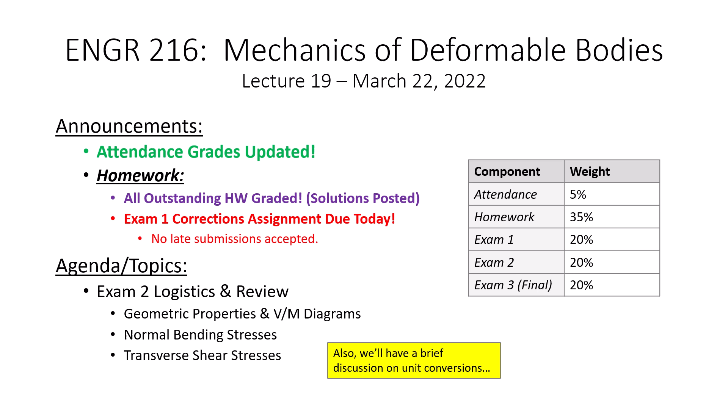Yes? We'll get the exam on Thursday. Are we all going to spread out like we did last time? I'm going to talk about that. The short answer is I'm not sure that it's really needed since it's going to be closed book. But I'm going to talk about that. So let's get into the logistics for the exam.

So again, we're going to do things a little different with this exam and the final. It's going to be closed book and closed notes because I want you to go through the process of preparing a formula sheet. I'm going to talk about the formula sheet in a second. I design my exams the way I've always designed them. I don't design them to be time critical. And the format's going to be largely the same.

There's going to be a series of short answer questions on the front, and then there's 3 computational problems for the exam. You are allowed a calculator, and I don't really care what calculator you bring as long as it doesn't have a Wi-Fi connection. I do highly suggest that you bring a straight edge. I think a straight edge will help you in the construction of shear and moment diagrams, and that'll save you some time, okay?

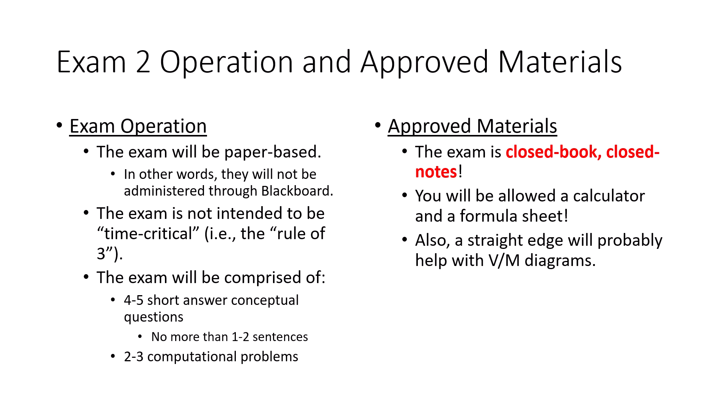Let's talk about this formula sheet. You can bring a formula sheet, it's an 8.5 by 11, both sides. You can put whatever you want on it, but there are the following stipulations. Number 1, make sure you have your name on it, because I am going to collect them afterwards.

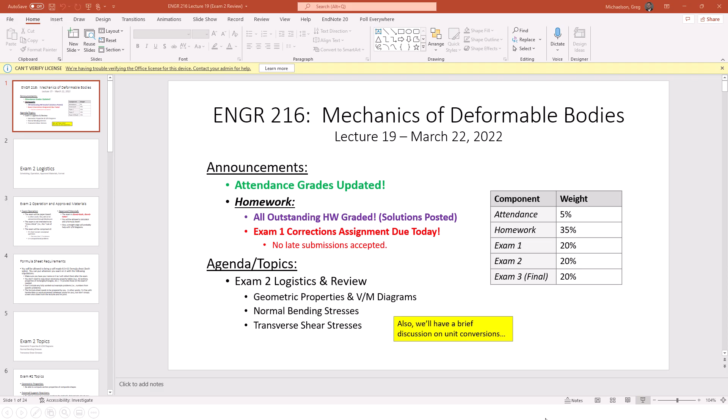You can put it small and maybe in the top right corner. Just make sure that I can find whose is whose, because I'll give them back to you after the exam's graded. You do not need to copy down necessary property tables. Not only is it in here, but it's on Blackboard. I want to show you, I'm actually giving you this on the exam.

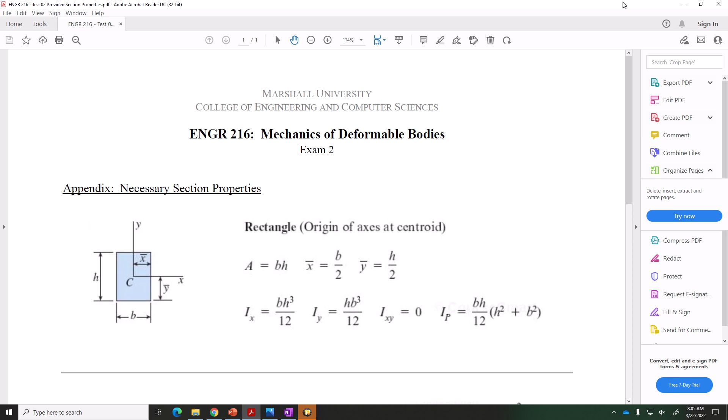So not only am I going to give you, here, let me move that mouse cursor out of the way. So not only am I giving you this, all of the necessary section properties for a rectangle, but I am also going to give you this, okay? You're going to get this snippet of the table from the back that has all of the properties of wide flanges. So you're not going to need to copy that down onto your formula sheet. I'm telling you right off the bat, this is what I'm giving you. And I'll go ahead and give you another one.

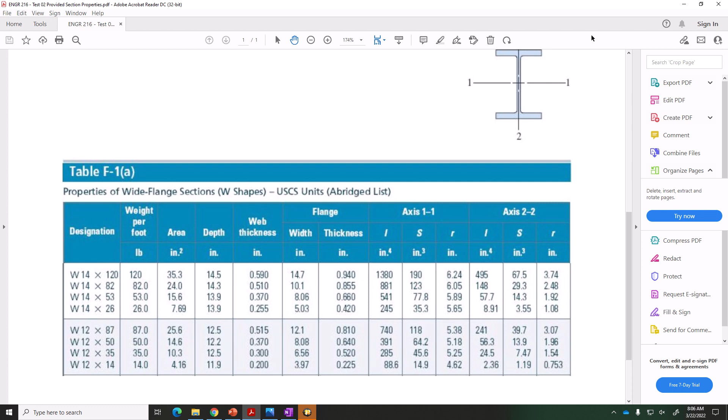Notice how the only shape that I'm giving you is the moment of inertia of a rectangle. In other words, any moment of inertia calculations that you need to perform on the exam, you will only need this, okay? No triangles or circles or anything like that. So I'm trying to make that part as easy on you as possible.

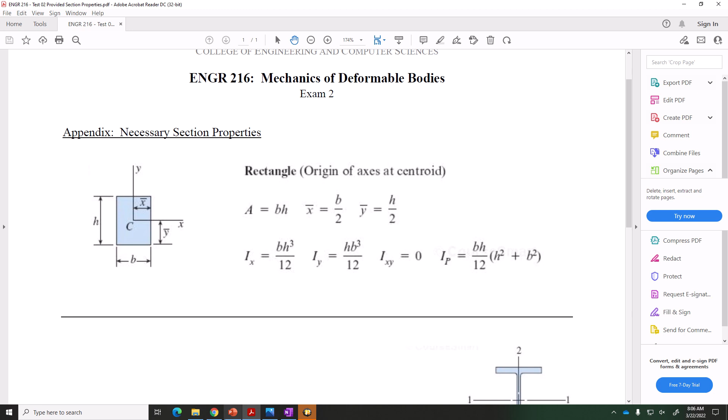In terms of remaining stuff on the formula sheets, one big thing is I don't want you to include any fully worked out problems. And what I mean by that is no numbers from specific problems on homeworks or the lectures. And I promise that's for you, not for me or trying to be stringent. There were a lot of instances on the first exam, where the exam was open book and open notes, where there were values on the exam that were sort of showing up out of nowhere. For example, there was a problem on the exam that had a 2x2 square bar, and a lot of people were saying that the area was 0.196 square inches. I'm like, where is that coming from?

And the reason is that we did a lecture problem that was kind of close to that, and that was the area in the lecture problem. So a lot of people were just using that value, and I actually think it added more mistakes. So that's the reason why I say don't include any fully worked out numerical problems with examples, because I actually think that'll hurt you on the exam.

But the last thing is I do think the formula sheet needs to be prepared by you. Okay, what I mean by that is I don't care if you handwrite it. I don't care if you use a word processor. I don't care about that. What I think would not be in your benefit is if you just took the screenshots from Blackboard, did a screenshot, put them on an 8.5 by 11 and hit print. I don't think that would be a valuable exercise.

I know you would probably have an adequate formula sheet in the space of about 5 minutes, but I think you would not engage in the process of actually making the formula sheet. And I think that process is important because by doing that, you're actually studying. Okay, and that's what I'm really interested in.

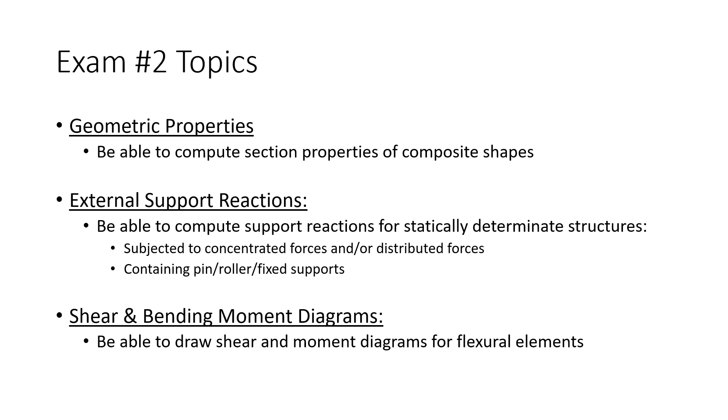Did I lose my clicker there?

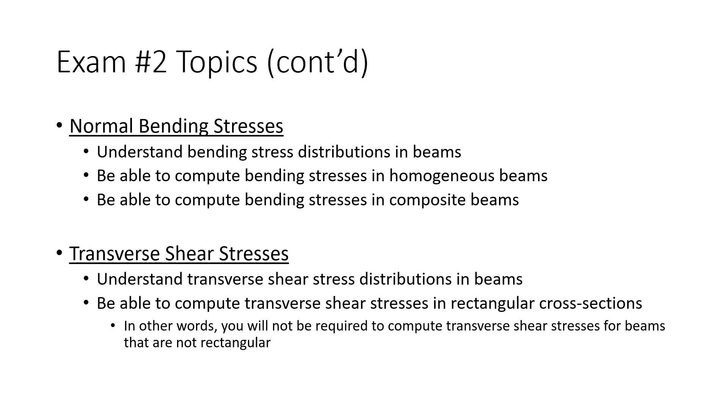For transverse shear stresses, make sure that you can understand what the stress distribution looks like, and the big deal is be able to compute transverse shear stresses in rectangular cross sections. In other words, you're not going to be required to compute transverse shear stresses for triangular beams or I-beams or circular beams or anything like that. Only rectangular beams. So I'm restricting that again to try and make that a little easier for you.

You all know that on the exam review slides, I tend to include a greatest hits of all the necessary formulas and equations to try and make studying a little easier for you. So here are, I would think, the relevant formulas and expressions for exam 2. First off, I'd say the parallel axis theorem is a big one. So the parallel axis theorem is what we use to compute the moment of inertia of any shape that is comprised of a series of simple shapes.

So if I have a cross-section that is composed of rectangles and triangles and circles, oh my, I can compute the moment of inertia of that collected shape using this expression, the sum of I naught plus AD squared. I naught is the centroidal moment of inertia of each individual shape. A is the area of each simple shape. And then D is the distance from the centroid of the simple shape to the centroid of the entire region.

And we determine the y bar, the centroid of the entire region, by just using sum of AY over sum of A. We have a tabular format that we've used in multiple examples in order to determine the moment of inertia of a composite shape. And when I say composite shape in this regard, I mean something that's not just a simple rectangle, like channels or angles or I-beams or beams with holes in it, etc. I'm not talking about beams of two materials when I use the word composite here.

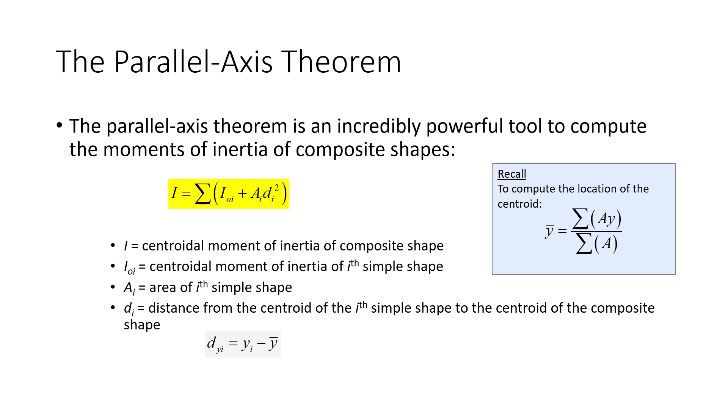Next, shear and moment diagrams. So all I include here on this is sort of the logic and the rules that we use. So for example, we understand the relationship between load and shear. So at a given point, the slope of the shear diagram is equal to the load on the beam at that point. And then between any 2 points, the change in shear is equal to the magnitude of load. Then we can draw a similar analogy between shear and moment. That at a given point, the slope of the moment diagram is equal to the shear, and between any 2 points, the change in moment is equal to the area of the shear diagram between those 2 points.

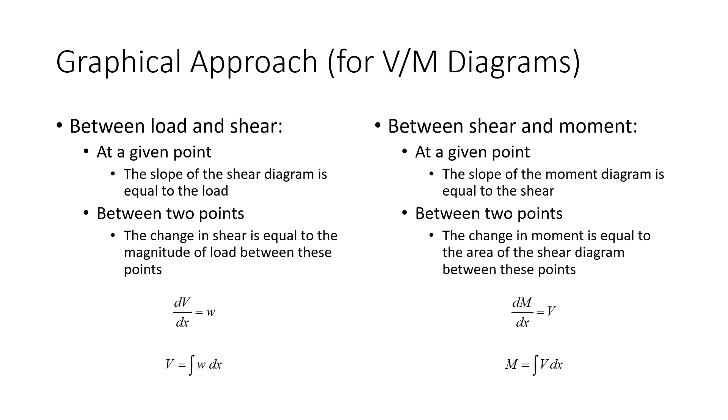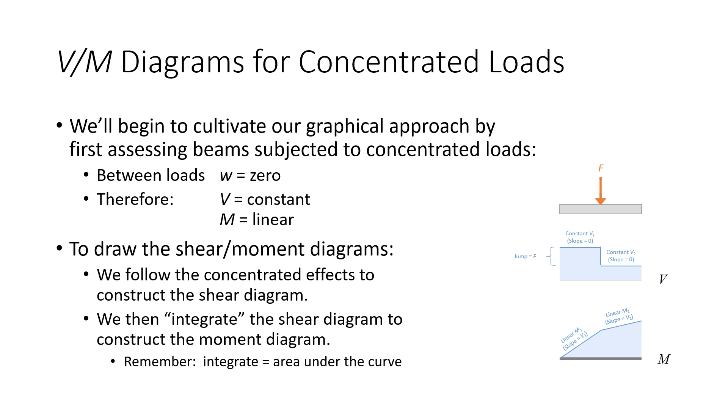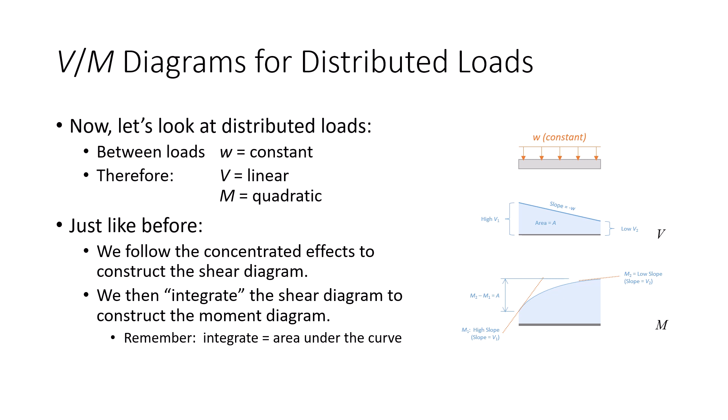What we had developed were rules for constructing shear and moment diagrams for concentrated loads, and then shear and moment diagrams for distributed loads. And for concentrated loads, we had sort of that stair-step pattern for the shear diagram, and then for the moment diagram, it was sort of that piecewise linear function where the slopes of the moment diagram were equal to the values on the shear diagram. For distributed loads, we have a linear shear diagram and then a quadratic moment diagram. And we use our sort of lot to a little or little to a lot analogy in regards to the slope because again, the slope of the moment diagram is equal to the shear.

Our bending stress formula is probably the real new stuff on this exam. The other stuff, in some degree or another, we've seen. I mean, we've seen centroids in statics, we've seen shear and moment diagrams in statics, so what we did in here was sort of a crash course refresher, but this is the new stuff. So to compute normal bending stress, we use the expression sigma equals My over I, so M is the applied bending moment, I is the moment of inertia, and y is the distance from the centroid to the point in question.

So I remember I did have somebody ask, well, how do you actually construct this? Well, it's just a line. That's the centroid, My over I. This is the y for this point. This is the y for this point. Just compute a stress.

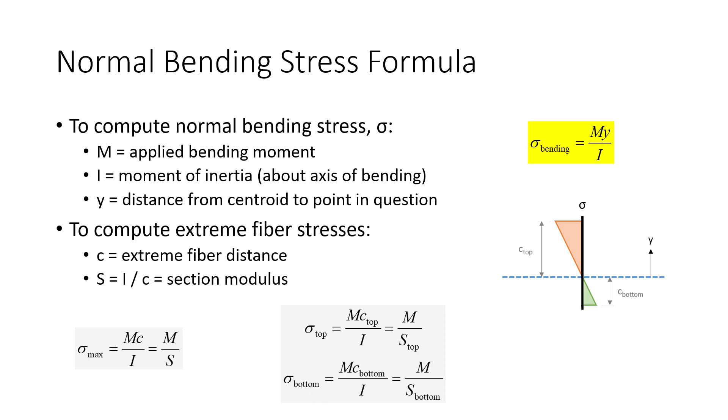Distribution, we know that the maximum bending stress occurs at the top and the bottom, and so we tend to use this term C, which represents an extreme fiber distance, to relate the maximum bending stresses. So sigma max, we tend to say is Mc over I. And if the section is symmetric, we can say that the stress on the top and bottom will be identical, and we can use this section modulus, M divided by S, to compute the maximum bending stresses.

Now for transformed sections, this is a little bit of a new slide, but I thought it kind of captured everything that's important for transformed sections all in one slide. So first off, note the use of a modular ratio. We tend to compute modular ratios as being bigger than 1. E divided by the smaller E, so the E for the stronger material, and E for the weaker material on the bottom. Now, in terms of transforming, we sort of have two options, okay?

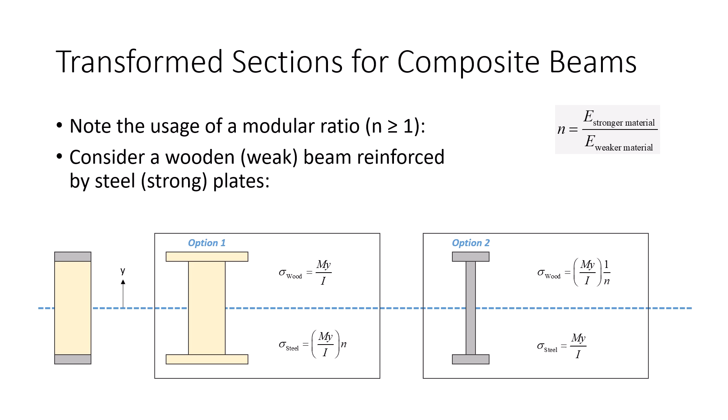So if we transform everything to a weak material, the stress in the weak material is computed. The stress in the strong material we have to adjust by n. Similarly, for this option, the stress in the strong material is just My over I, but for the weak material, where here we multiply by n, here we're dividing by n. Okay? And so I thought that was hopefully a simple but neat way of collecting this idea all into one slide.

For shear stresses, VQ over Ib, V and I are constants. b conceptually can be a variable, but for a rectangular beam, what really changes for a rectangle is Q, and Q is, if we're talking about a rectangle, the area of the section times the moment arm, the distance from the centroid of the beam to the centroid of the block that we're considering.

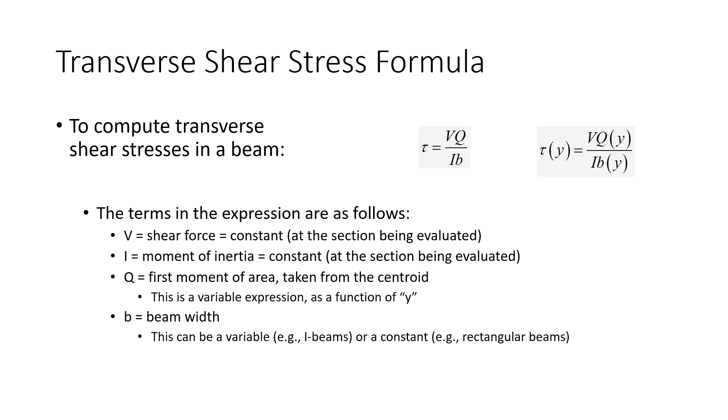Okay, now, I am going to open up the questions here in a little bit. I want you to sort of let this stew and marinate in your brains as you collect all this. But I got something I want to do on the side. I want to talk about unit conversions and dimensions. I think that during this course, and honestly, maybe this should have been something I did on day one, but I guess I had an assumption that this was stuff that you had seen in other classes, but I'll tell you, there were a lot of trip-ups on the exam regarding this stuff, and this is usually pretty easy.

I cover this not because I don't think you can do it, I know you can do it. I want to try and prevent simple mistakes and simple things that you need to do on the exam. What I don't want to have happen is I don't want you to have a problem with the unit conversions and it causes a greater confusion with the exam in general. I want this to be the easy part, and so I want to cover this in a somewhat formal fashion. Now, if you're good with unit conversions and you're comfortable with this, I apologize that the next 10 minutes are maybe a little boring, but I want to make sure everybody's familiar with this, okay?

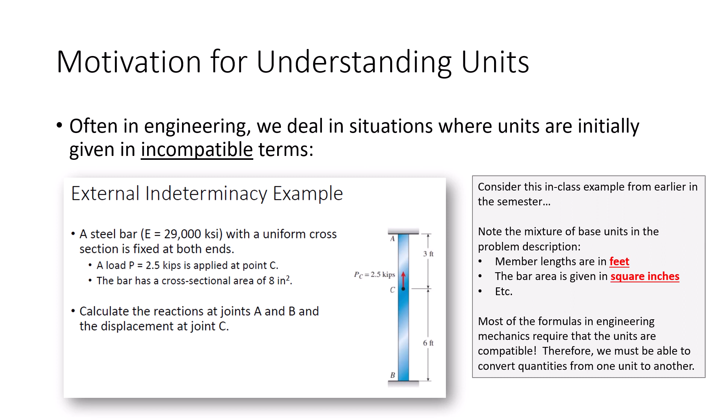These are common things that engineers have to deal with all the time. Just about every equation that we use in this class assumes that the units are compatible, that they are dimensionally non-specific. And so it's the responsibility of you as the engineer or you as the analyst to convert the quantities into a usable unit system. And this was an area that really tripped a lot of people up on the first exam. Now, how we deal with this is to use unit conversions, okay?

In other words, what we do is we use known unit equivalencies to express a quantity in desired terms. So a known equivalency would be something like 1 foot equals 12 inches, right? That's a true statement. So 1 foot divided by 12 inches is 1. I'm not saying 1 divided by 12 equals 1. That's not the case. I'm saying 1 foot divided by 12 inches equals 1, okay?

And so by multiplying a given term by these conversion factors, we're eliminating the undesired units and expressing a quantity in terms that we want to use. Let's consider this. We had a problem very similar to this on the exam where you had to take a quantity that was in pounds per foot and convert it to kips per inch. A lot of people had issues with this, and so I want to make sure that we're comfortable with this. How do we convert 3,200 pounds per foot to so many kips per inch?

Well, we know the following. These are my unit equivalencies. I know that 1 foot equals 12 inches. I know that 1 kip equals 1,000 pounds. So the way that we do this is we usually set up the following table. I have this horizontal line, and I can draw it as long as it needs to go, and I start out with my given quantity, 3,200 pounds on top and the foot on the bottom. This pounds per foot, that's a fraction, right? So pounds goes on the top, feet go on the bottom. And what I want is kips per inch, okay?

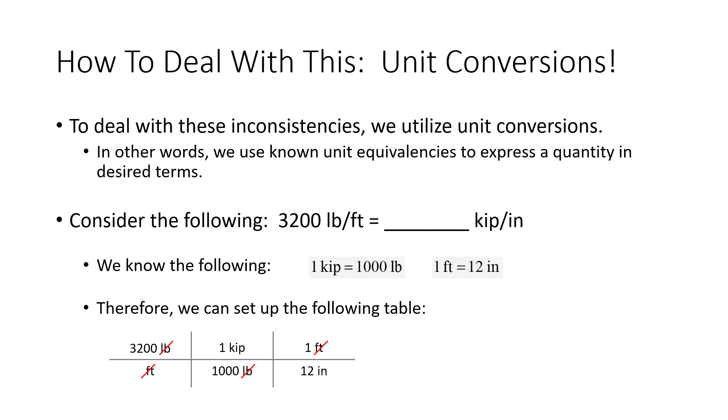I need to use another unit conversion. In this case, I'm placing the foot on the top and the inches on the bottom, because I've got foot on the bottom, foot on the top. And there you go. What am I left with? Kips and inches. So this is what I plug in my calculator: 3,200 times 1 times 1. Typically with unit conversions, you can ignore the ones. So 3,200 divided by 1,000 times 12, I get 0.2667 kips per inch. That's how you do that, okay?

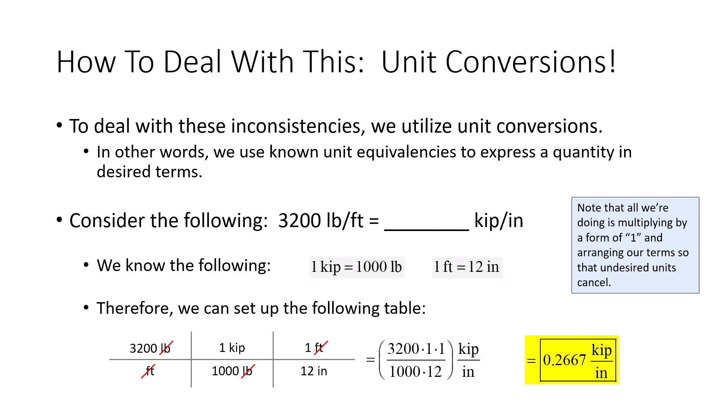Is everybody comfortable with that? Because we're going to do some problems to make sure that everybody is comfortable with it. I know if this seems too simplistic for some of you, my apologies, but I don't want this to be a sticking point on the exam. Again, note that all we're doing is multiplying this by a form of 1. 1 kip over 1,000 pounds, that's 1. 1 foot over 12 inches, that's 1. But we're arranging it so that our undesired units cancel. That's all you're doing, okay?

So for example, how would we convert the following moment? How would we convert 250 foot-pounds to inch-kips? Well, we say 250, and now we have to figure out where to put the foot and where to put the pounds. Foot-pounds is a multiplication, okay? So both of those would go on the top. So think of it as times feet times pounds. And then what am I going to do?

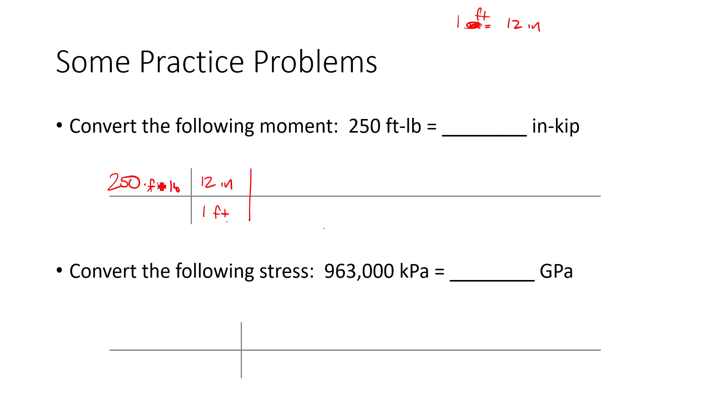I want inch kips, right? So we know that 1 foot is 12 inches. So what I'm going to do is I'm going to put the foot on the bottom and the inches on the top, so that and that cancels. So I get inch pounds if I were to just carry this out. But that's not what I want.

I want inch kips. So I've got pounds on the top, put pounds on the bottom, 1 kip here, the pounds cancel. And then what am I doing in my calculator? I'm doing 250 times 12 times 1 divided by 1 times 1,000. And that's going to result in inch kips. And so when you chuck that out, you get 250 times 12, which is 3,000. 3,000 divided by 1,000 is 3. So that's 3.

Is everybody okay with that? Is that comfortable? I want to make sure that we're comfortable with this stuff. Has it been a while since you've done this? Like done it this way? I'm imagining that this is like bringing it back to chemistry, am I right? This is probably how you did this in chemistry. Well, this is how you do it in general.

Now, for this one right here, I want to make sure that we're all comfortable with metric. So 963,000 kilopascals. And specifically what I'm interested in is the prefix. Now, as you get comfortable with prefixes, you can usually just go, okay, kilopascals to megapascals, I'm counting the decimal back 3 places, mega to giga, I'm counting back another 3. So you can probably look at it and just say, well, it's 0.963.

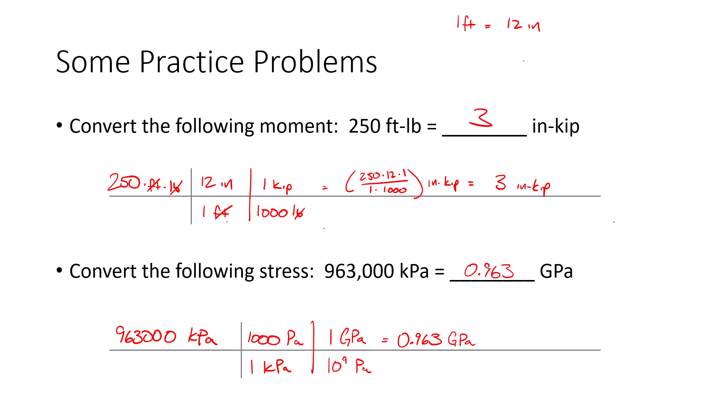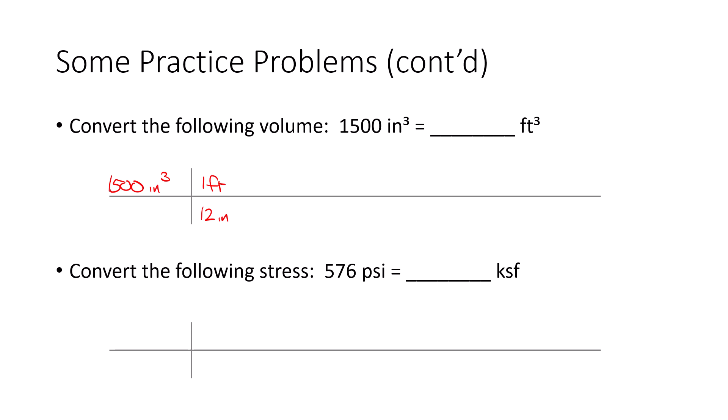So let's convert the following volume, okay? So 1,500 cubic inches. Well, I know that there's 12 inches in a foot. So I'm done, right? No. If I have x cubed over x, assuming x is a number, let's not get into math land where we're dividing by 0, that just gives me x squared, right? So I'm not canceling the inches, I'm only canceling one of them, but there's 3 of them.

So what I've got to do is I've got to do this 3 times. Because I've got inches times inches times inches, which is inches cubed, that cancels and leaves me with feet cubed. And so when you chuck that out, you get 0.868.

This one's a little tricky, okay? So I've got 576 PSI. I want to convert that to KSF, okay? And if any of you think who would care about that, in geotech that's not an uncommon expression of stress. And for you mechanical engineers, okay, I guess you're not going to use that very often. So what we're going to do is we're going to say 576 pounds, but then inches squared, right? Because that's what PSI is, pounds per square inch, okay?

So if we want to convert to kips, we'll say 1,000 pounds is 1 kip, and then we'll say 12 inches is 1 foot. But I got to do that one twice because there's inches squared. Notice I'm putting the pounds on the bottom, so the pounds and the pounds cancel, and I'm putting the inches on the top, so the inches and the inches cancel. So I've got pounds and pounds canceling. I've got inches, inches, inches cancel. And so I'm left with kips per square foot.

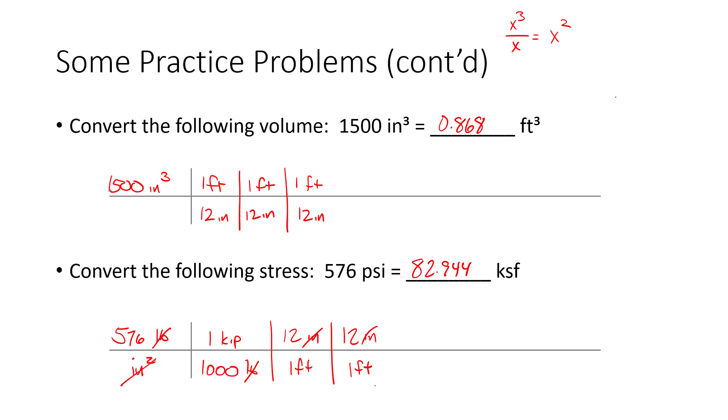Now let me talk a little bit about some advice for the exam. Just about every quantity in engineering mechanics can be expressed with 2 base units: whatever you choose for force, whatever you choose for length. For example, your deformation is in units of length. Your moment of inertia is in units of length to the 4th. Your stress is in terms of force per length squared. So if you choose a base unit for length and a base unit for force, everything else tends to go

from that. My general advice is that unless it becomes evident based on the units that are given, you should strive to choose a unit system that results in as few unit conversions as possible to make your life a little easier. But in the absence of that, good choices for US units are kips and inches, and for SI units are kilonewtons and millimeters. So moments are going to be in inch kips, stresses in KSI, or in SI, kilonewtons per square millimeter or kilonewtons times millimeter, etc.

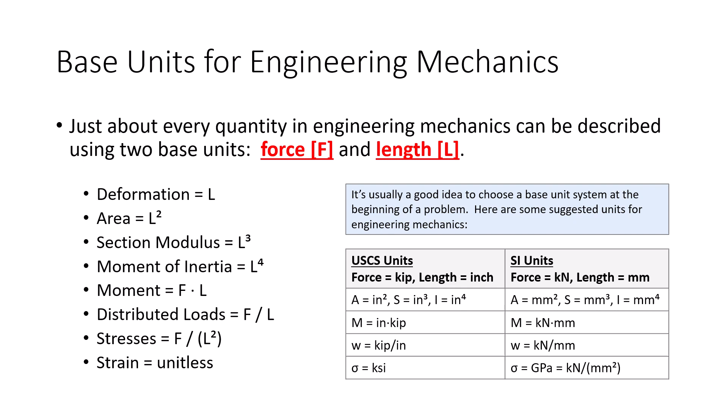You can certainly plug them into some equation, and it will give you a number, and the number won't make any sense, okay? So you need to look at these and go, okay, this is in kips, this is in pounds. Maybe turn this to 5 kips. Maybe turn this to inches, right? So now I've got kips and inches. That is a big mistake that I've seen on exams: just not doing the unit conversions at all.

Another big mistake that I see all the time on student exams is to just skip writing the units at all. To just say, oh, E is 5,000, P is 5,000, L is 13. No, L isn't 13. L is 13 feet. You might feel like you're in a hurry and you don't have time to write out the letters I and N or F and T, but that's important. Without them you're going to miss out on the necessary context. If you take the time to actually look at those units, it will reduce errors.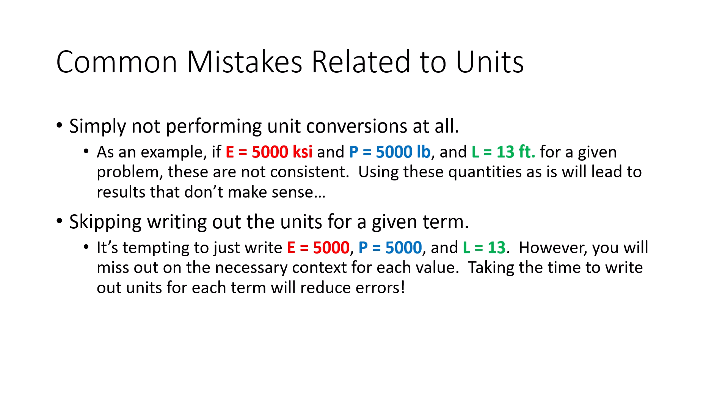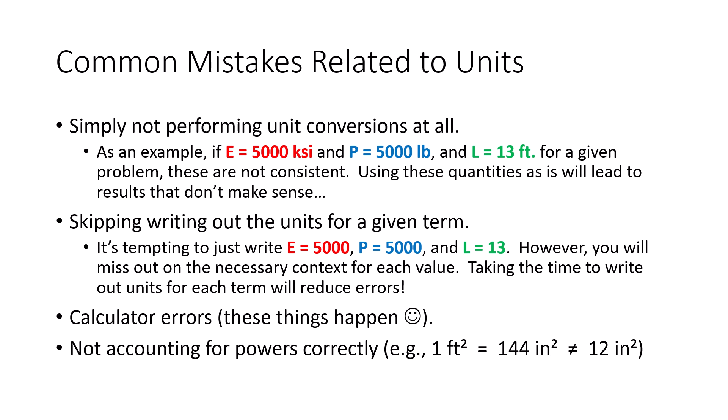Now, calculator errors. I tend to think that the simplest way of avoiding those is to just do your calculations twice so that you get the same answer. But they are going to happen; there's no way to really eliminate them. The other is not accounting for powers correctly. For example, 1 foot squared is 144 inches squared, not 12 inches squared. So make sure that you account for the powers correctly; that's another big mistake I've seen on exams.

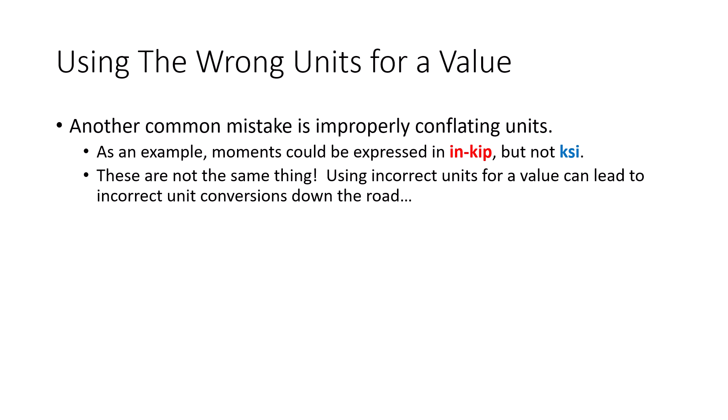Another common mistake is improperly conflating units. This is a really big one that I want to make sure everybody understands. Moments, for example, can be expressed in inch kips. Inch kips means inches times kips, not KSI. They're not the same thing. KSI is a unit of stress. Inch kips is a unit of moment. Just saying that a moment is KSI is going to lead to incorrect unit conversions down the road, which is going to lead to problems with units.

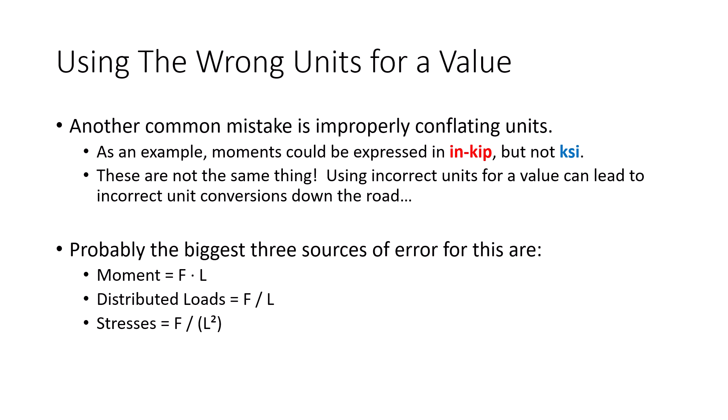Probably the 3 biggest sources of error for this are when students are dealing with moments, stresses, and distributed loads. I can't tell you how many times I've seen a student with a beam with a distributed load say it's 12 KSI. No, that's stress. That's not the same thing. So I want to make sure that we're clear on this. Which of these are valid units for stress? Is KSI valid?

Yes. What about kilonewtons times millimeters? No. What about PSF? What about per inch? What about inch pounds? Gigapascals, there we go. What about kilograms per square meter? Kilograms is a mass, not a force. Megapascals. PSI. Per foot.

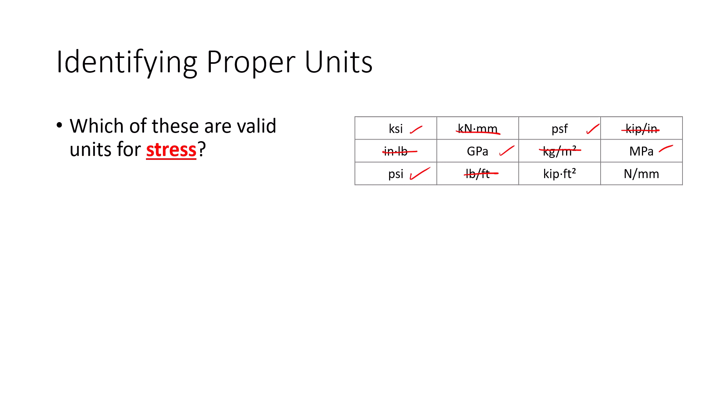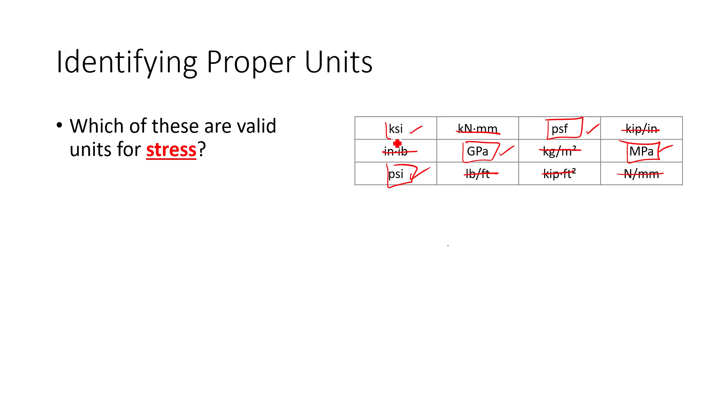What about kilonewtons times millimeters? This first one right there, is that good? Per inches? No. Inch pounds? Kilograms per square meter?

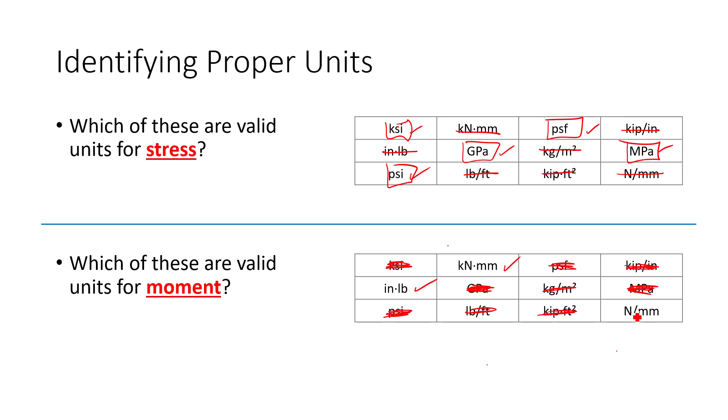Kips times square feet? Newtons per millimeter. So these are the only two. So what's maybe a valid question for you to look at, and these slides are on Blackboard: were any of those, maybe a third or a fourth question, ones that don't apply anywhere? Because some of them don't really apply to any of the units or the terms that we've looked at so far. Okay? All right. My apologies if for some of you that was kind of boring, but I think that was necessary to go through.

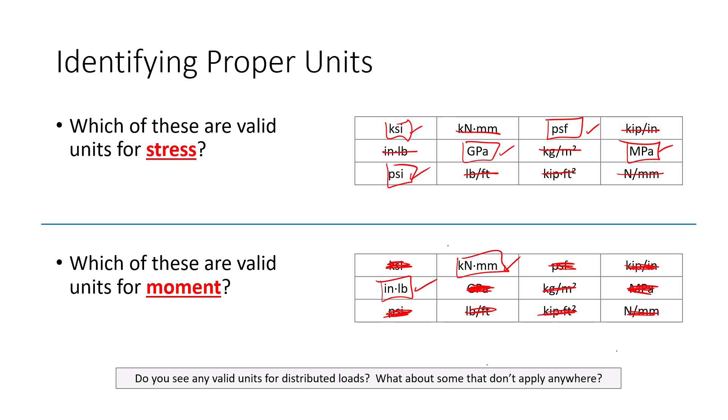Before we move on, does anybody have any questions about unit conversions? Is everybody okay with this? I'll post this to YouTube quickly. I ought to try and pick a few problems that we've done and make sure you're comfortable with the unit conversions. Okay, one final thing, and then I'll shut up and turn it over to you. If you check the Teams channel, I have posted some representative problems out of the textbook. If you can do those problems, I think you're going to be fine on the exam. So yeah. Now I'm going to shut up, turn it over to you.

Any questions about the second exam? I know there's got to be some. A lot of people in here are thinking about the wonderful world of thermo right now. For an example, so. All right, hold on now, come on. Exam 2 land in Engineering 216. There's got to be some questions, come on. You feeling nervous about it? Feeling good about it? If you are feeling nervous, about what? Like, we can talk about it, we got plenty of time.

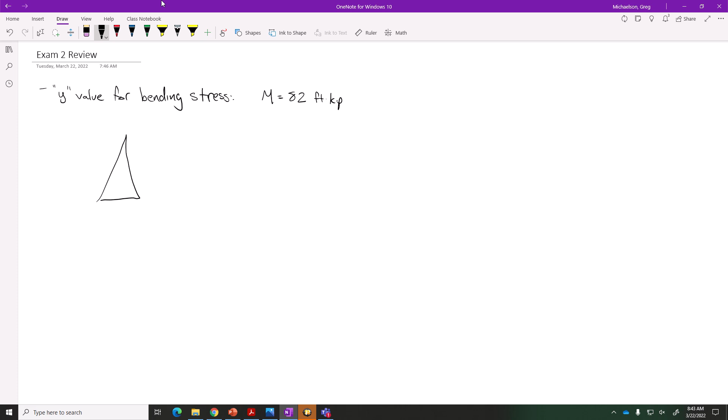So M is, I'm making these values up, 82 foot kips. Let's make it 82 foot kips. Let's say the beam is 14 inches tall and 5 inches wide. Now again, while we're not going to have triangular beams on the exam, I actually think this problem is healthy from a review standpoint, okay?

So what we're going to do is explore sigma equals My over I, okay? We're not only going to draw the stress profile, but we're going to pick some points in between and see what y is. Now the first thing I want to make sure we're clear about is, do we all know where the centroid is for this triangle? If I have a triangle that's h tall, how far up do I go? H over 3, right? So if the centroid is right here.

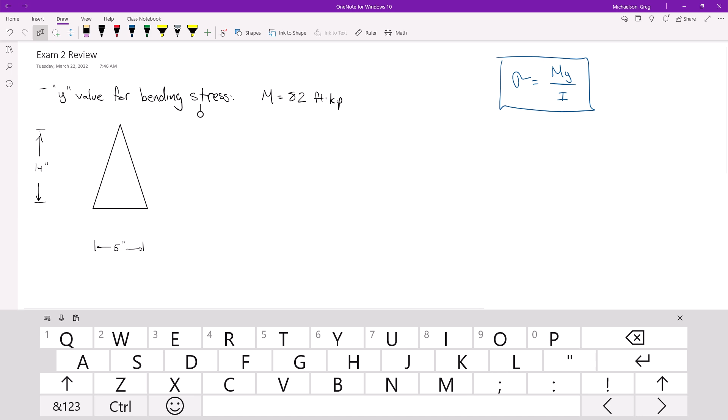Hold on, I want to see something. Let's try this, see if I can. Oh. Let's see if I can make this pretty, because, hey, that's better than this. I like yours better. That makes one of us. What I mean, it's South Bend. Okay.

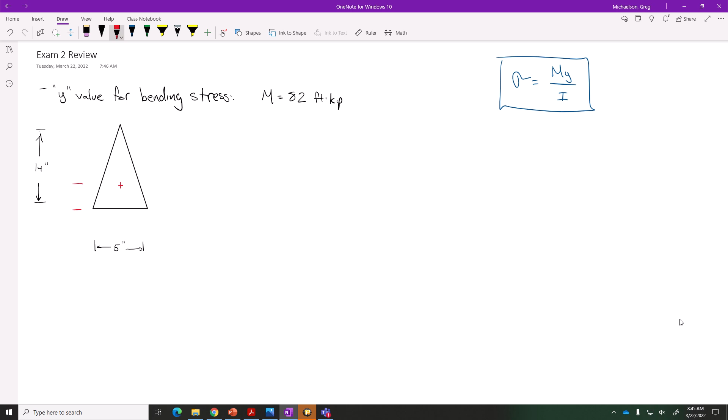Centroid, and this dimension right here is going to be 14 inches over 3, which is what? I don't have my, I do. So it's, what, 4.67? Or equivalent. Thank you. 4.67 inches, okay? So what I'm going to do is draw a line extending from the centroid. I will put the centroid right there.

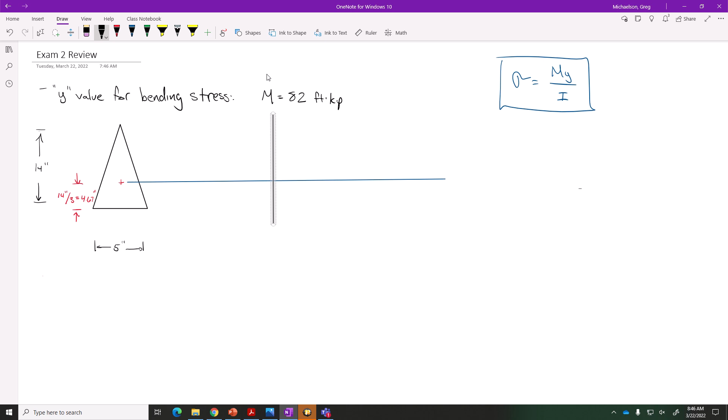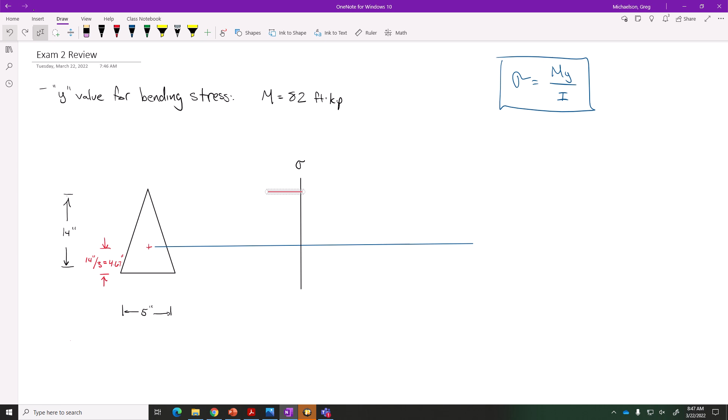With me so far? Okay, so the first thing to keep in mind is that bending stresses at the centroid are zero. Just point blank, they are zero. These are going to be our bending stresses. Let's move this all down some so that we can all see what's going on. Now, I propose the bending stress profile is going to look like a line that crosses the centroid right here. Imagine you had a ruler; it's going to look something like this. Why does this keep popping up? Something about like that, right?

So here are the bending stresses here, and here are the bending stresses here. It goes through the centroid. So let's label some things. Right here, stress is 0. Right here, this is sigma max for the bottom, and this is sigma max for the top. And I'm going to ask for the stress right here. So we're going to call this sigma Greg.

And where is that? Well, let's see. The beam, we said, is 14 inches from the top. I want to know the stress right here, where that's halfway up. So sigma Greg is at h/2. I put my name there just because I asked the question. All right.

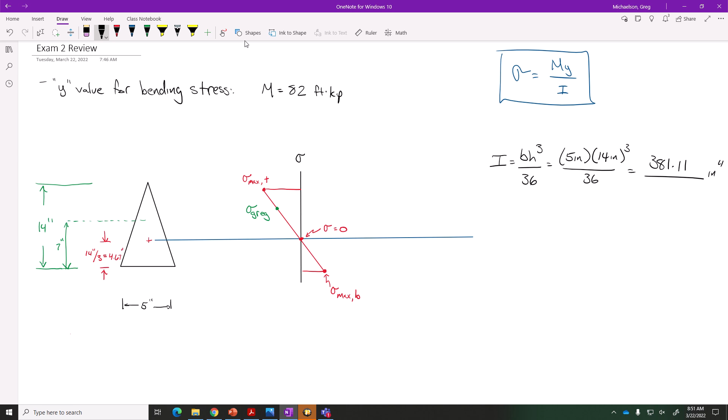M was 82 foot kips. Now, let's say I want my stresses in PSI. If I want my stresses in PSI, this needs to be in inch pounds. Remember, a moment is a force times a length, so I need pounds times inches. So, 82 foot kips. 1 foot, 12 inches. 1 kip, 1,000 pounds. This is going to be a big number. What is that?

984,000 inch pounds. Okay, so what's the expression that we're exploring again? It was sigma equals My over I. That's what we're exploring. So we know what M is, and we know what I is. And notice how we have already accounted for unit inconsistencies. We've already taken care of it. So the only thing left is y, which is the purpose of this question. Remember, what is y defined as? It is defined as the distance from the centroid to the point in question.

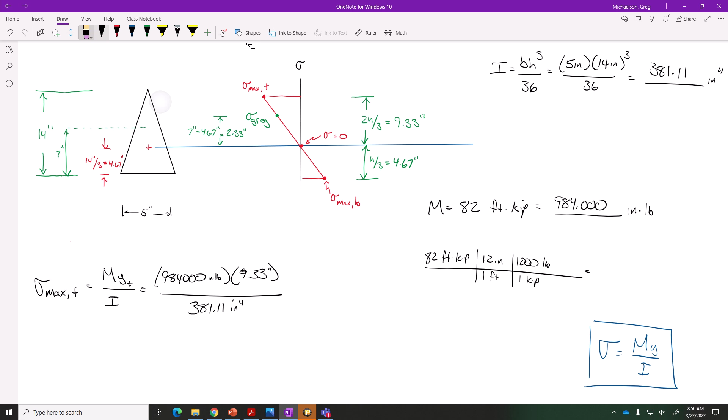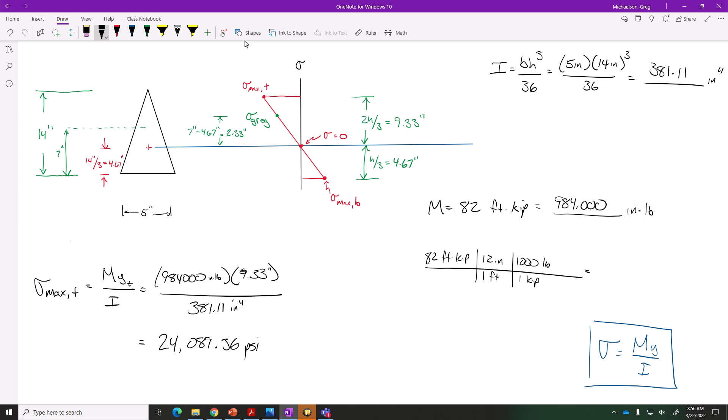That was funny. All right, so what are we getting for this? 24,089.36 PSI. Have a second on that? There you go. So there's the stress. Okay. So what about the stress on the bottom? It's MyB over I. So same M over I. 4.67. Exactly, it should be half, yeah. And the reason it's half is because we're dealing with the triangle. It's 2/3 height versus 1/3 height. So what do we get right here? 12,000.

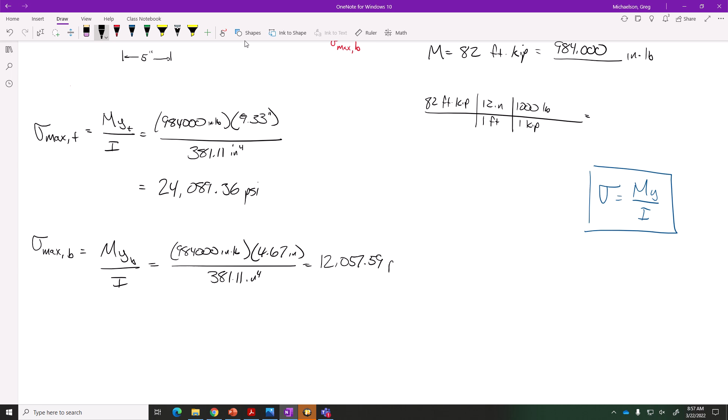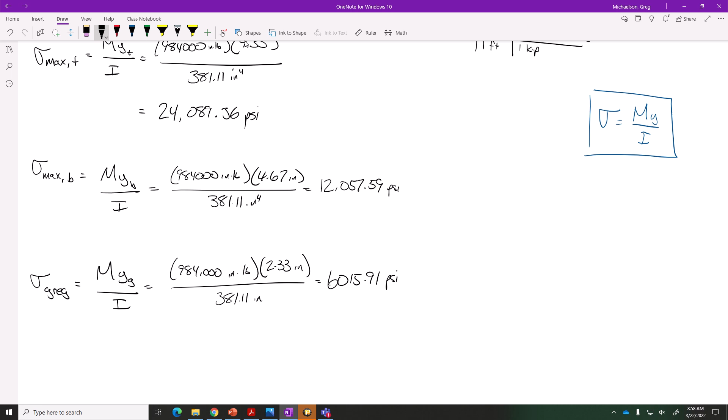And as for what I asked for, what did we say this was? It was 2.33? I just made it up. What do we get for this? 6,015.9. Have a second on that. All right.

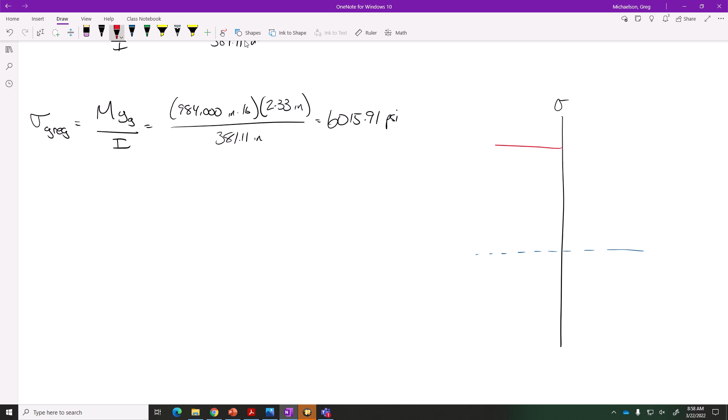So, to be clear, to answer really sort of two questions at once, here's your stress profile, here's your centroid, and the stress profile looks something like that. This stress is 12,057.59. This stress is 24,089.36. And then I asked for a stress that was kind of like right here. That stress is 6,015.91.

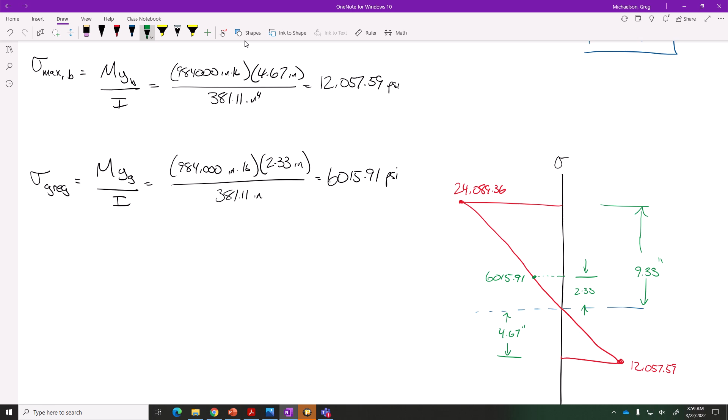Very common in the world of engineering that you might be interested in stresses not just at maximum stresses, but stresses along the cross section. For example, maybe I've welded an attachment right there and I want to see what the stresses are on the weld right there. Very reasonable question to ask. So if we want, we can say, here's our dimensions. 9.33. 4.67. 2.33. And let's make sure this is PSI. PSI.

Stop with the inches. Make sense? How about everybody else? That's actually really good practice for the exam. Pretty reasonable in the end, like 24 KSI, 12 KSI, that's pretty reasonable.

This isn't Calc 3. We haven't had Calc 3 yet. You said partial. When you have Calc 3, you'll get it.

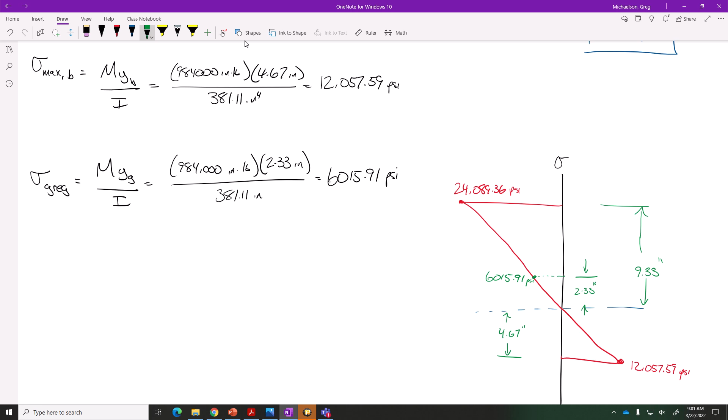Yes. For finding the maximum shear stress, it was V max that you used, and then for the stress at the 1-inch section, it was a different V value. Yes. But then I think you used the same V max value for every... I did? I think. Let me check the solution on that. But I can tell you for this example, the idea is that for the section in question, we use the shear at the section in question. And then for Vmax, we use the absolute maximum magnitude across the board.

Let me check the solution to homework 6. If there's an error, I'll get it fixed. Because that one was like the distributed load. Yes, I think so. It's been a while since I did that solution. Let me check, or I'll post it to Teams and we'll get it figured out. Any other questions? This is good stuff. I want to make sure that you're comfortable with all this.

Would you like me to release you to the wonderful world of thermo and dynamics a little early? Let's just do this for the rest of the day. Do you have an emergency that you need us to solve?